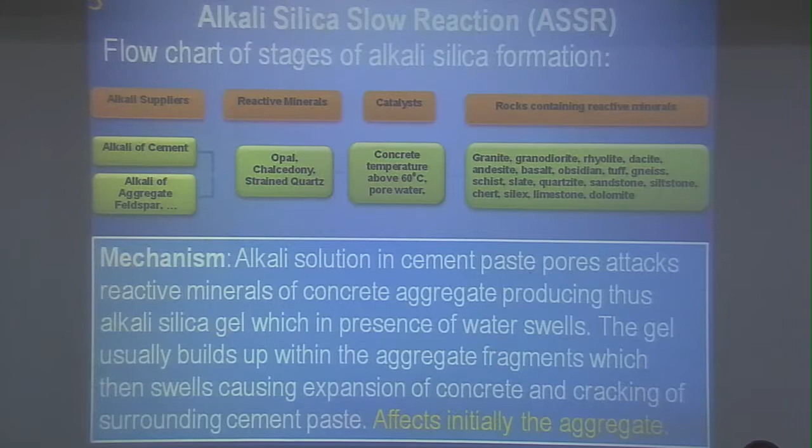I will start first with alkali silica slow reaction. It is one of the most exploited topics nowadays in current literature publications. What is the chemical model of that? Alkali of the cement reacts with reactive minerals of the aggregate of the concrete, causing alkali silica gel presence, which in the presence of water swells.

It is very important to note that the gel formed by the alkali silica reaction is within the aggregate fragments of the concrete, not within the cement paste. At the end of the day, in the case of long-term performance of that chemical disease of the concrete, it may cause swelling of the concrete itself.

I also wish to emphasize that as a catalyst for this process, there is concrete temperature - which available case studies emphasize a benchmark of 60 degrees - and also pore water in the concrete, meaning moisture in the concrete. There were a whole variety of rock masses, ranging from igneous to sedimentary rock masses, which can be subjected to slow alkali silica reaction.

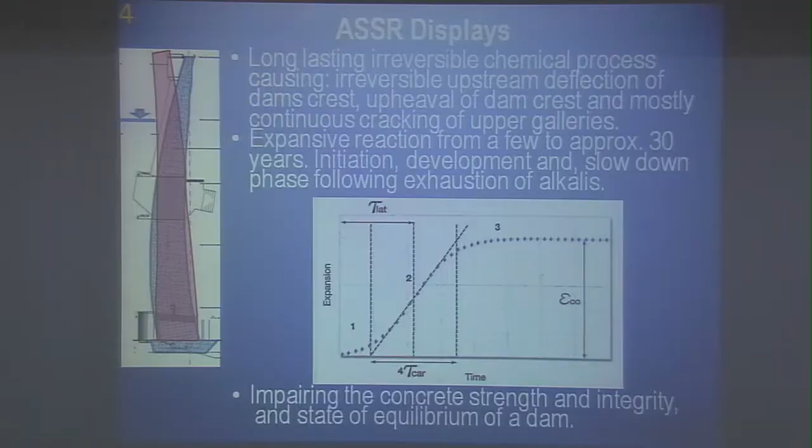The main issue here is the mechanism for such an unusual deflection of the dam. Why is it deflected that way? Well, it is our interpretation and assessment that this is because of interaction of the swelling process and the stress fields imposed by service load conditions.

Here, it usually happens that during low water levels, usually during summer periods of time, with higher temperature of concrete due to environmental temperature, the dam by itself deflects upstream.

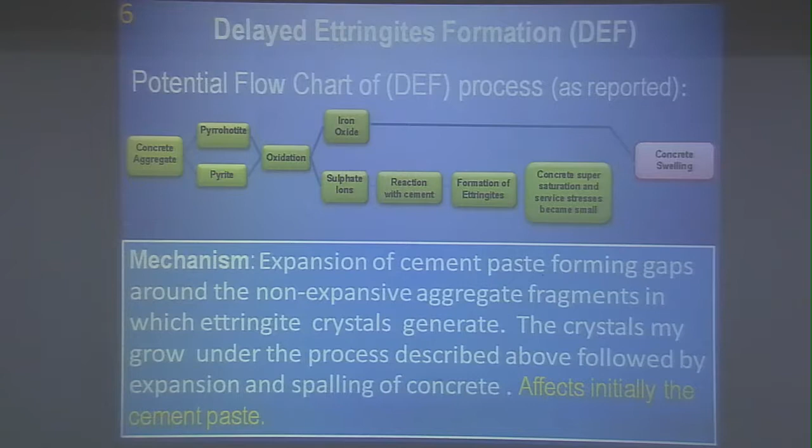Unlike the alkali-silica reaction, it affects the cement paste, not the aggregate. That is the main difference between delayed ettringite formation and slow alkali-silica reaction.

May I continue, please? The mechanism of the formation of damage to the dam due to delayed ettringite formation is very similar to that of the alkali-silica slow reaction.

It becomes pronounced in the zones of tensile stresses of the dam. Again, we are witnessing the case of interaction between the swelling process by ettringite and the current service stresses of the dam body due to service loads. That is the case with lower water level and higher temperature of the concrete.

There is another issue which I wish to bring to your attention: why is cracking happening within the upper stretches of the dam, within the galleries? Why is it happening?

Again, because of interaction between the swelling process and the current stresses there. Due to lower water level but minimum concrete temperature, there might be tensile stresses developing around the galleries. Those tensile stress fields,

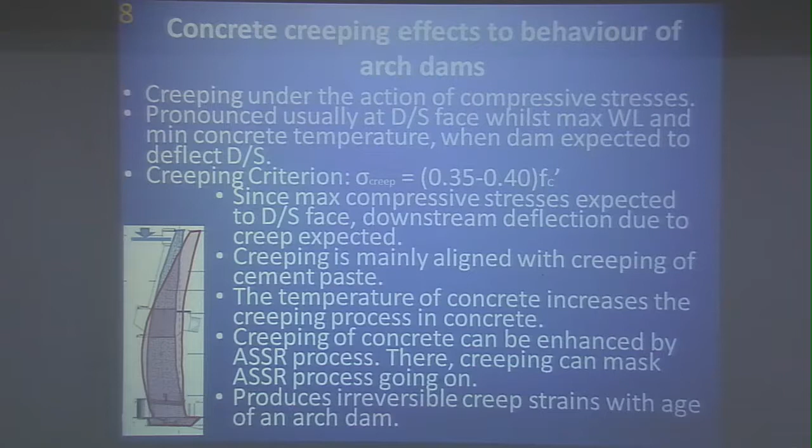Creeping of the arch dam, of the concrete in arch dams, is a complex process, please, and there is not much information about that. There are some empirical approaches which we have taken from the Ross Dam, United States.

There is another issue, which is the joints of the arch dams. Every arch dam could have joints. This is due to the technology of construction of that kind of dam, in which the mechanism of calcium hydroxide within the concrete paste could react with water, which can capture carbon dioxide and produce calcium carbonate and water.

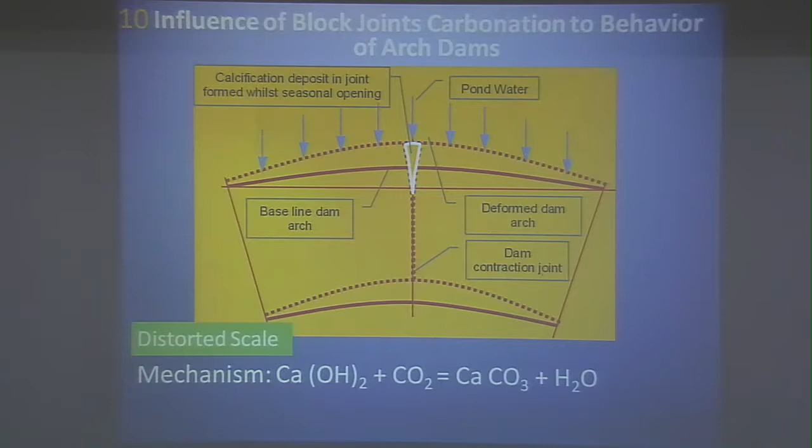Conclusions have already been emphasized here and there. I wish to thank you for your attention, and I'm really sorry that I didn't have more time to explain in more detail the other issues of this very important topic, which is very important nowadays for all dams, including the arch dams.

The various aspects required to be looked into while reviewing safety of an existing dam: first is design flood study review. Next is to carry out a flood routing study and work out the new MWL. Then check the adequacy of freeboard for that revised MWL. Then look into whether there is a need for an additional spillway, or if a parapet wall is not there, whether it would work or not.

Those aspects. Then we are also required to look into the examination of various causes of distress in the dam. There could be excessive seepage through the dam, wet spots, lot of water in the galleries, leaching, cracking in the dam due to various causes, damages to concrete in the spillway, mainly abrasion damages, energy dissipation. Slotted roller buckets have a lot of problems, so do many stilling basins. Indications of any piping, boiling, things like that on the downstream of the earth dam.

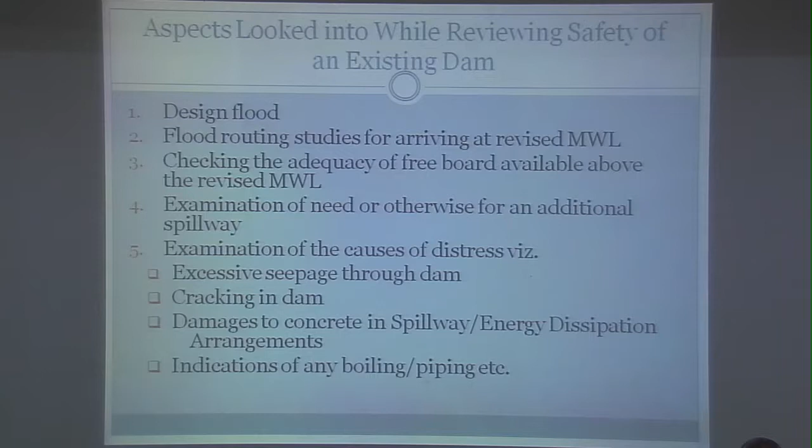Then we may have to check the stability of the dam and spillway due to the revised MWL on account of revision in design flood, and on account of changes in seismic parameters or change in seismic zone. Then there are issues related to hydromechanical equipments, outlet works, and things like that. There are a lot of other aspects as well.

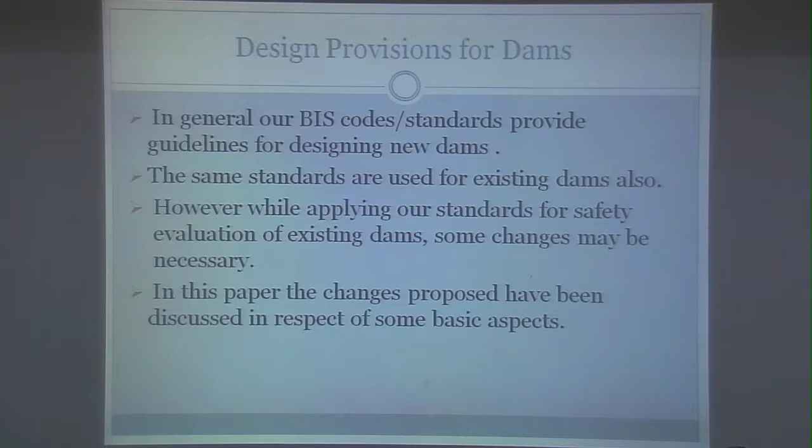In general, our BIS codes and standards provide us guidelines for designing new dams. The same standards we have been using for existing dams also. However, it is felt that while applying our standards for safety evaluation of existing dams, some changes perhaps could be considered or may be necessary. In this paper, I tend to dwell on those aspects in respect of a few subjects.

The first aspect is the freeboard aspects. So the relevant BIS codes I have listed there: IS 10635 is on embankment dams, and 6512 is for gravity dams. What these codes provide is that the 1 meter solid parapet wall on top of the dam is not to be considered as part of the freeboard. We don't consider it as part of the freeboard while designing new dams, whether it's an embankment dam or a gravity dam.

However, for existing dams, because the flood many times goes up two times, three times, and like that, there may be a need to make some deviations in this. So what I propose, and it's for the August gathering to consider, is for an existing embankment dam, the solid parapet wall could be taken as part of the freeboard, in case the parapet wall is otherwise structurally safe.

The second thing is, the maximum water level for the revised flood should be lower than the top of the impervious core. This we need to ensure for an earthen dam. And for existing gravity dams, maybe the revised MWL could be allowed to reach up to the dam top, where a 1 meter solid parapet wall is there. These are not just my ideas, some of them are also given in the USBR and various other literature.

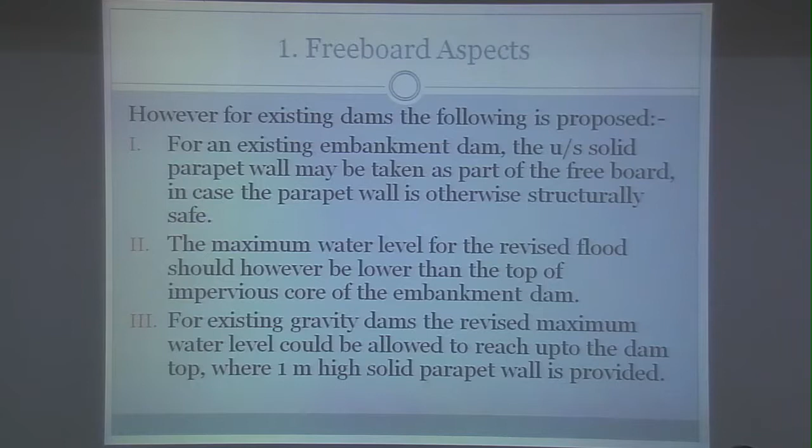Then there is the issue of consideration of 10% gates as inoperative. IS 11223 guidelines for fixation of spillway capacity says that this condition is to be checked, and it is to be considered as some sort of an emergency condition, and a reduced freeboard could be acceptable. So we have been following this condition for the design of all new dams.

However, for existing dams, probably we could make some deviation here. As I said, the flood after revision goes up 2 times, 3 times, and maybe more, 4 times, 5 times. So in general, probably I feel there may not be any need to check an existing dam for this 10% inoperative gates condition. However, we have to make sure that all the gates are in working condition, and all the O&M guidelines and all those things are being followed.

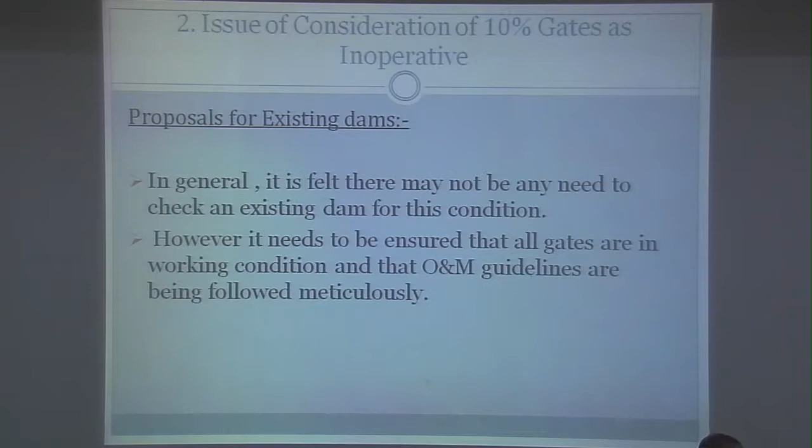Coming to the third point: the stability analysis of an existing earth dam. This is basically with respect to the method to be used for analysis. Supposing we are required to check the stability of an existing earth dam, IS 7894 is the code of practice for stability analysis for earth dams.

The methods discussed in this code are the Swedish slip circle or the Fellenius method, and the sliding wedge method for rock fill dams. The Fellenius method considers only the moment equilibrium and not the force equilibrium of slices. It provides a factor of safety generally on the lower side, resulting in a conservative design, which is fine for a new dam.

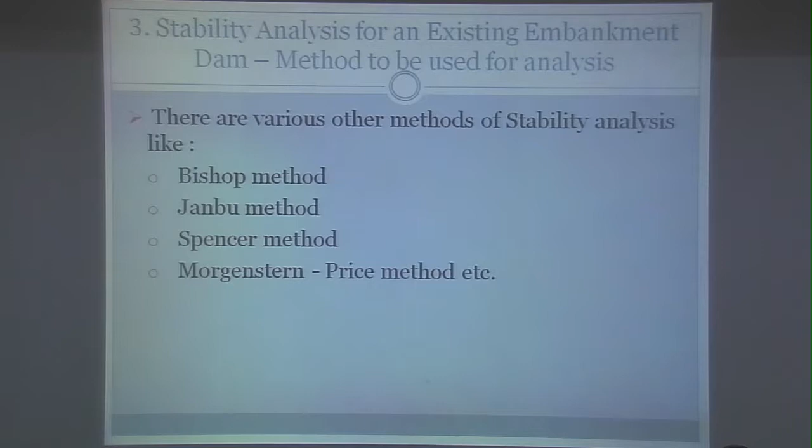But there are other methods of stability analysis also, and I have listed a few here: Bishop's method, Janbu's method, Spencer's method, Morgenstern Price method, and others. It may be preferable to adopt a method which satisfies both the moment equilibrium as well as the force equilibrium, and which takes into account the interslice forces and results in a closed polygon.

The methods recommended, which could be considered for carrying out stability analysis of an existing earth dam, are the Morgenstern Price method and Spencer's method. We could make use of software like Slope W from GeoSlope.

What happens is that the Fellenius method gives a low factor of safety, and if it's an earth dam, making any changes in an existing dam is difficult. So if we are checking the stability of an existing earth dam using these other methods, probably we may get a safe factor of safety, one which is adequate, and we may not have to do anything to them.

Then the next point is stability analysis for an existing concrete or masonry gravity dam. This is with reference to permitting cracking in the dam. As per IS 6512, the code of practice for design of concrete masonry solid gravity dams, we do not permit cracking in dams. Cracking is not permitted for any new dam.

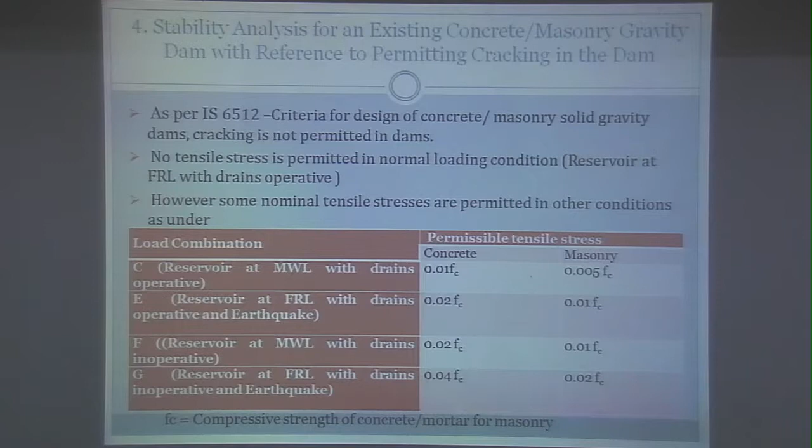And we could follow the approach of USBR, given in the publication Design of Small Dams. The methods are fully described there; I am not getting into that. I am only listing the assumptions involved.

For static conditions, meaning the MWL conditions with drains inoperative, the vertical stress distribution along a horizontal plane without uplift is assumed to be linear between the upstream and downstream faces of the dam. This is the first assumption.

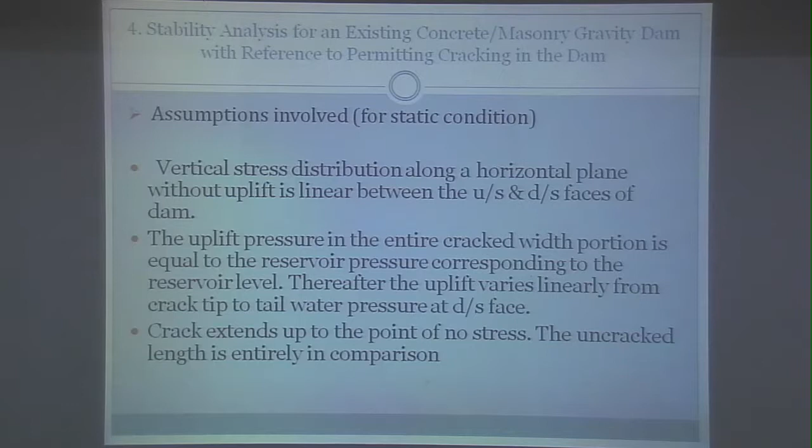The second assumption is that the uplift pressure in the entire cracked width portion is equal to the reservoir pressure corresponding to the reservoir level, the MWL in this case. Thereafter, the uplift varies linearly from that point to the tailwater pressure on the downstream face. The crack extends up to the point of no stress, and the uncracked length is entirely in compression. These are the three assumptions.

The stability criteria followed when cracking is allowed is that we check for compression and we check for sliding stability using the uncracked base width of the dam.

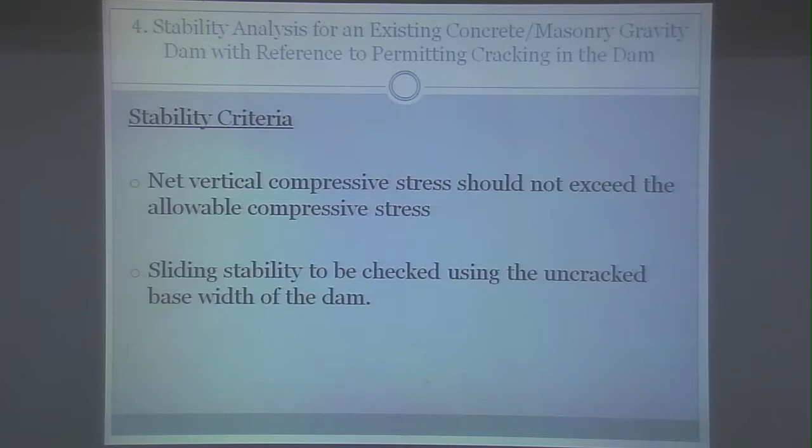For condition G, the earthquake condition with drains inoperative, there is an additional condition given by the Bureau of Reclamation: in the crack length, the uplift pressures are assumed to be zero. So there is a crack length and an uncracked length. In the crack length part, the uplift pressures are taken as zero because during an earthquake event, the opening and closing of the crack is so rapid that it does not allow the reservoir water and associated pressure to penetrate.

This is an additional assumption. If the sliding and stress levels are found satisfactory for the cracked section during an earthquake event, then there is a need to also check the post-earthquake static condition. While checking for the post-earthquake condition, we should include the full uplift pressure in the cracked part also.

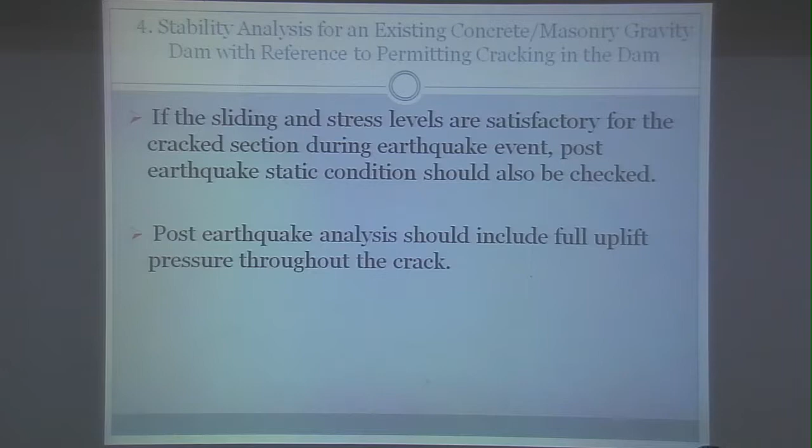And that's it. Thank you.

This long experience in dam design has brought out clearly what the criteria to be adopted.

Hello? Switch off. Do you hear now?

This long experience in dam design - Mr. Mathur, with his long experience on dam design, has clearly brought out the distinction between the standard practices to be adopted and how the design criteria can be distinguished between an existing dam and a new dam. Especially in this seminar, with engineers from different states involved in checking the stability of various structures under the DRIP project, I hope his talk could be very useful.

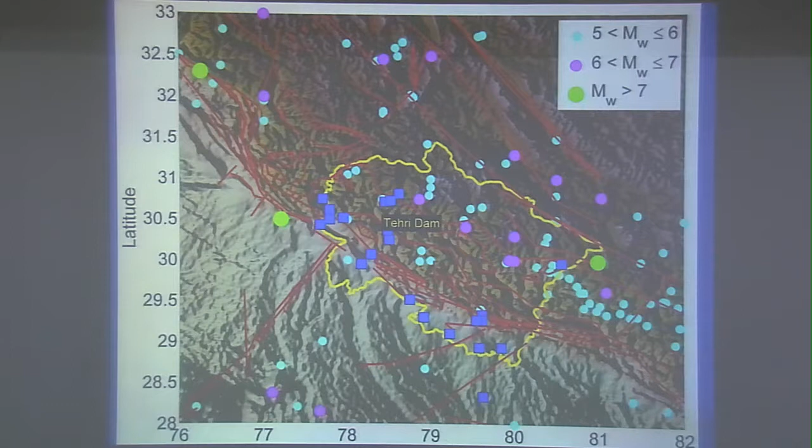This app gives you a list of faults and other information. If you zoom into the Uttarakhand region, the fault map looks like this. These blue squares are the locations of the new dams, and Tehri Dam is here in the state of Uttarakhand. You can see that most of these dams are located very close to faults, or may even be lying on top of faults themselves, which is a little scary when you look at the figure.

So now, regarding Tehri Dam, a lot of structural studies have been done - 1D, 2D, finite elements, so much information is available. But what is missing is a reliable seismic input which can be used to check the safety of this dam. So we have concentrated more on generating a reliable seismic input, and we have not touched much on the structural aspect at this point of time.

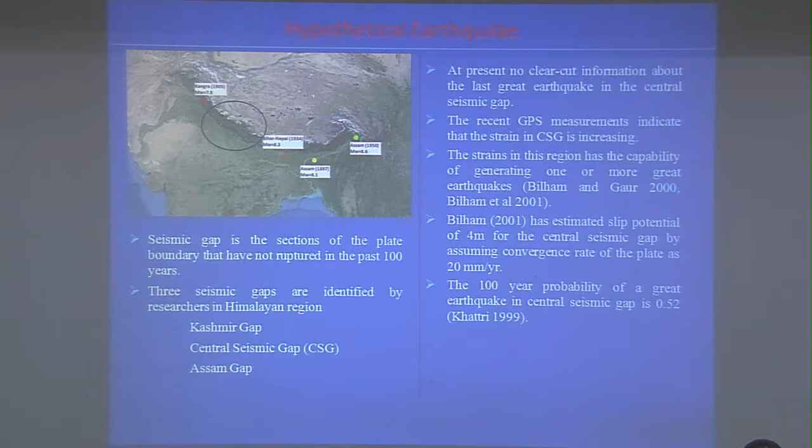As I already told you, our interest is in generating reliable seismic input. If you see the past data, the maximum magnitude observed in this region is 8.5, based on past seismicity and GPS measurements. So what we have done is try to generate ground motion for this 8.5 as accurately as possible.

So we have done the finite element model of the whole Indian subcontinent, including topography, bathymetry, everything. The material properties are mostly taken from worldwide databases, but since some material properties are available in the Indo-Gangetic Basin and Himalayan regions, we incorporated information from NGRI and other journal articles. The number of degrees of freedom is around 12.7 billion, and our average element size is around 2 kilometers.

So now this finite element mesh we have developed, and of course you cannot run it on one computer. You require a supercomputer which is available at our IIT - this is our Virgo cluster. So now we have run this.

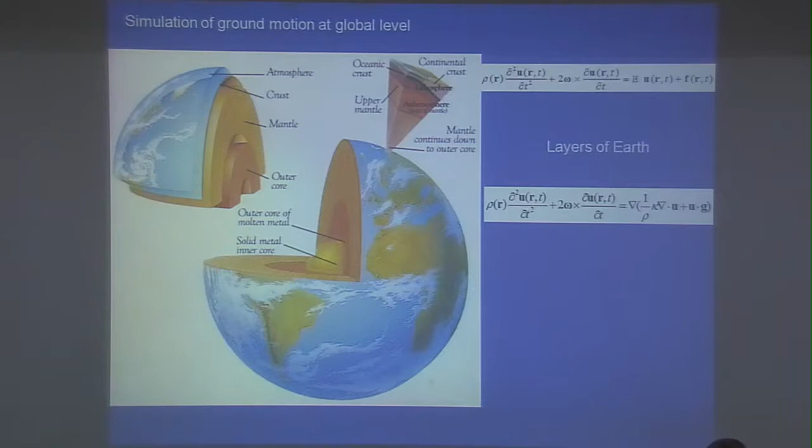These are the basic equations of motion for our Earth. If you open any geophysics textbook, you will get all these equations for a spherically symmetric Earth, including gravitation as well as hydrostatic equilibrium. So these are some of the basic equations which we solve using our finite element mesh.

Regarding the seismic force we should use to simulate ground motion, lots of data sets are available. We ourselves have a project from the Ministry of Earth Science to quantify these seismic forces. So we have developed stochastic models based on past earthquakes, which we used to generate slip distributions for the 8.5 magnitude scenario.

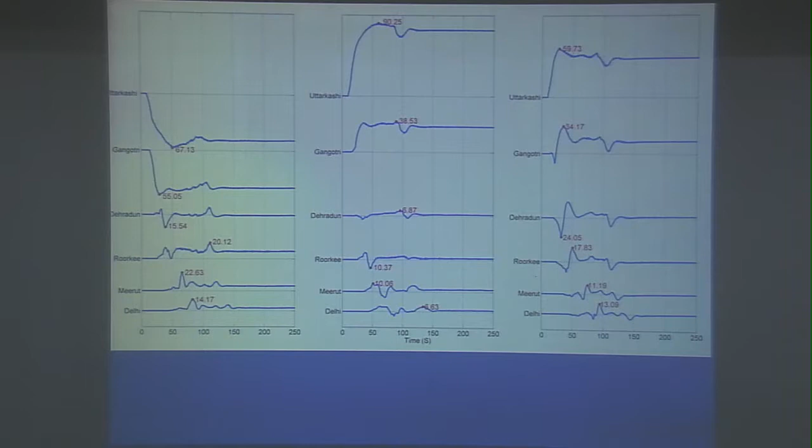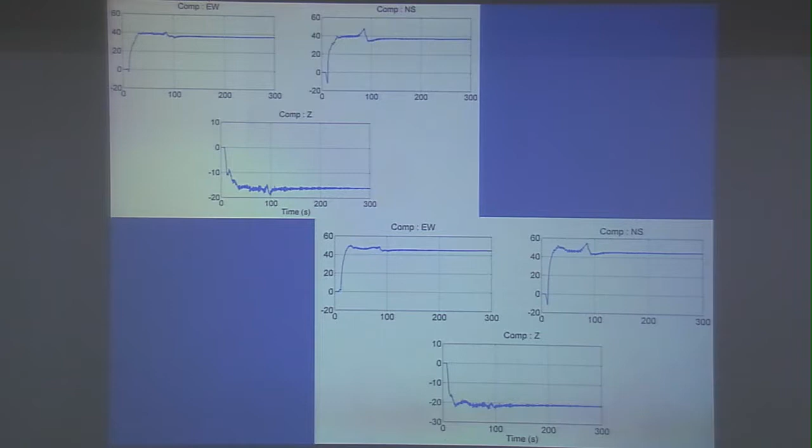So once again, these are displacements at Tehri for a variety of slip models. If I change the slip, this is what happens - I'm showing two samples. You can see all the displacements are oscillating and not coming back to zero, indicating residual displacement after the end of the earthquake.

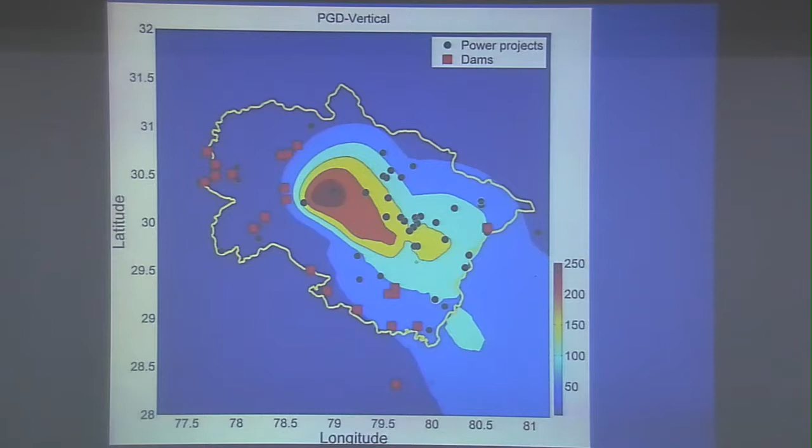These are the ground residual displacements after the end of earthquakes, which you will see as cracks or openings. This is shown in east-west and north-south directions, and this is the vertical displacement. The uplift is about 2.5 meters, meaning after the earthquake ends, the whole land will rise by around 2.5 meters.

Now physically, what does this tell us? This is one spectacular dam failure, the Shih-Kang Dam in the Chichi earthquake. This dam was built on top of the fault itself, so when the dam is built on the fault, you can see during this earthquake this portion has raised by 7 meters.

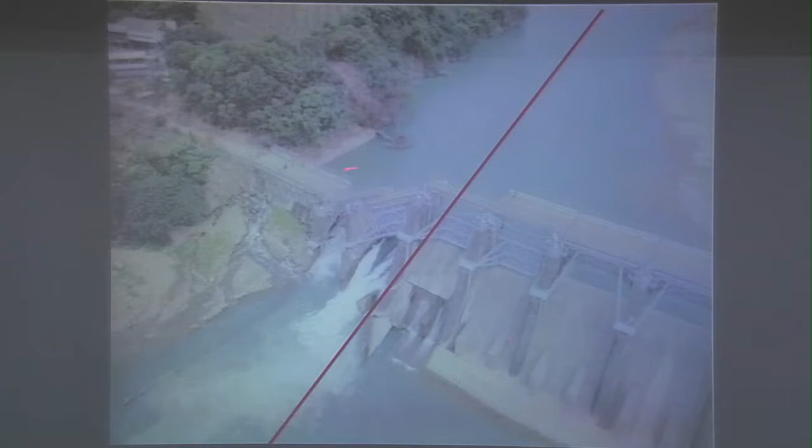So now you can see there are no cracks, nothing, but this dam failed due to this peak ground residual displacement. The same figure, if you see from the other side, you can see this whole portion has raised by something about 7 meters.

So this type of thing becomes very important in design. When the structures are very near to this fault site, it is not just only the PGA, but peak ground residual displacement is also a very important parameter when you are designing dams very close to these faults.

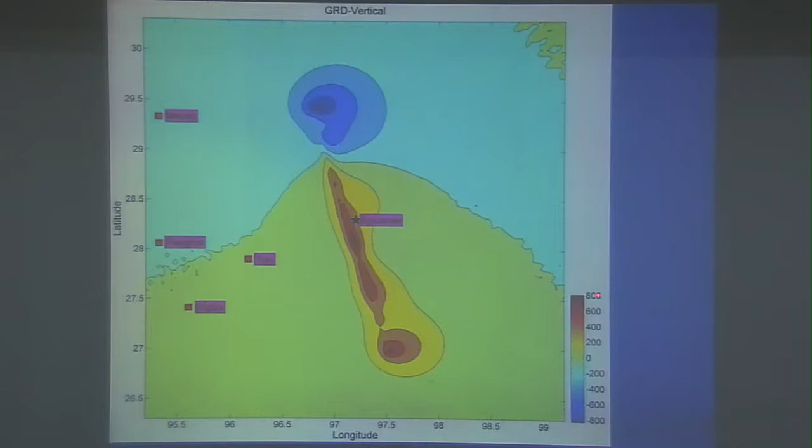In our Uttarakhand regions, our peak ground vertical displacements are not as high as 8 meters, we got some 2.5. But when we simulated for some events in the northeastern region, especially this 1950 Assam earthquake, the residual displacements are also as high as 8 meters.

So that is about peak ground residual displacements, which become very important when you are close to these faults. But when you do traditional vibration analysis, we require acceleration time histories. Now whatever finite element mesh and other things I have shown are more reliable in simulating low frequencies such as displacements, but when it comes to accelerations, it becomes a little bit complex.

So we have used some empirical Green's function techniques and others to simulate ground motion. In the last 5 years, IIT Roorkee has put up a nice network, and we have very reliable and very good quality strong motion data. So we used these things to simulate accelerations also.

This is the fault plane, and these are the earthquakes for which we have the data at Tehri station. So this is some empirical EGF technique.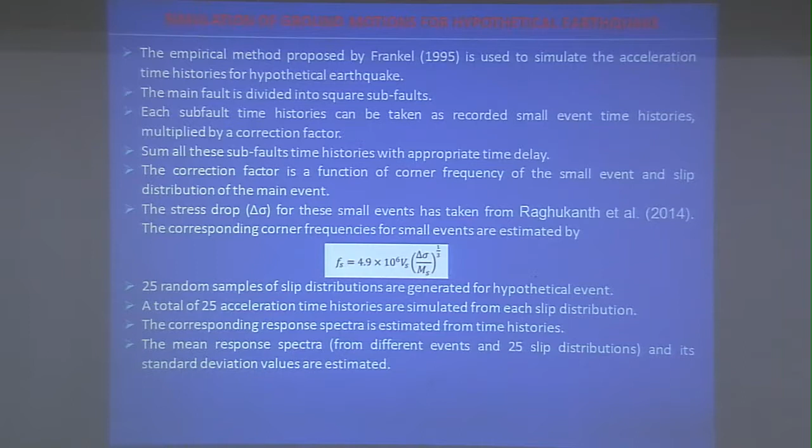Yes sir, I understood your point. See, for the 1950 earthquake in Arunachal Pradesh, there is one lake named Madhuri Lake. There you can see the fault upliftment of something around 6 meters. There was an artificial lake which was formed after the earthquake.

No, this was the fault scarp itself. No, the lake was from the fault scarp, we can see. Sir, yes.

No, what I have done is this: these things are valid at rock level. As you rightly pointed out, if I include the geotechnical information... I told the 10 kilometer depth. No, as I already told you, we have done this at rock level. Of course we have to add one more geotechnical layer, and it may not be like a rigid body, some translations will be there.

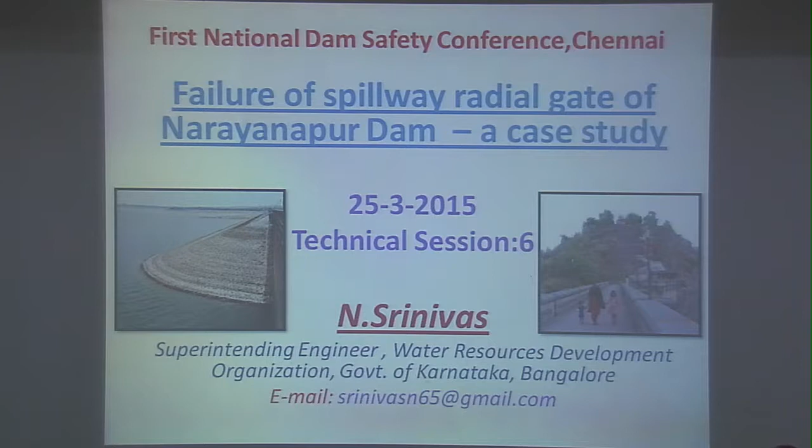So I will be talking about the failure of the spillway gate of Narayanapur Dam, how a construction error as well as an improper maintenance schedule or inspections can lead to a failure. The presentation is structured with some salient features of the Narayanapur Dam, followed by the genesis of the gate failure and the event itself, the implementation, and a conclusion.

The Narayanapur Dam has been provided with 30 radial spillway gates, out of which 25 are in the main spillway and 5 are in the auxiliary spillway. They are of the size 15 meters by 12 meters with a discharge capacity of 45,000 cusecs per gate, operated with an electrical rope drum hoist mechanism. It was commissioned during the period 1982 to 1984, and fabricated and designed by TSP and Sikka. The spillway capacity has been designed for about 13,40,000 cusecs with a frequency of 1 in 10,000 years, with 10% of the gates in non-operation condition as per the norms.

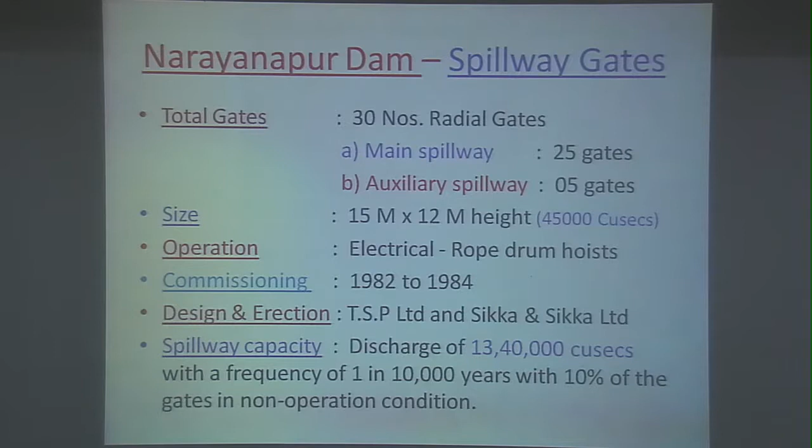This dam has manifested its distress signals even earlier to the event which I am now presenting. During 1990-91, there were some failures in the weld joints in some gates like 3, 6, and 15, which was rectified by the fabricator himself. And in November 1992, the auxiliary spillway gate number 5 got damaged.

When the government constituted a committee to find the cause, we found that it was the failure of the bulkhead gate. All these 5 auxiliary spillway vents, before the erection of the radial gates, were fitted with elements: 3 vents were fitted with stop log elements and 2 vents were fitted with bulkhead gates. But even after the commissioning of the spillway gates, the bulkhead gates were not removed from their position. So the bulkhead gate failed during 1992.

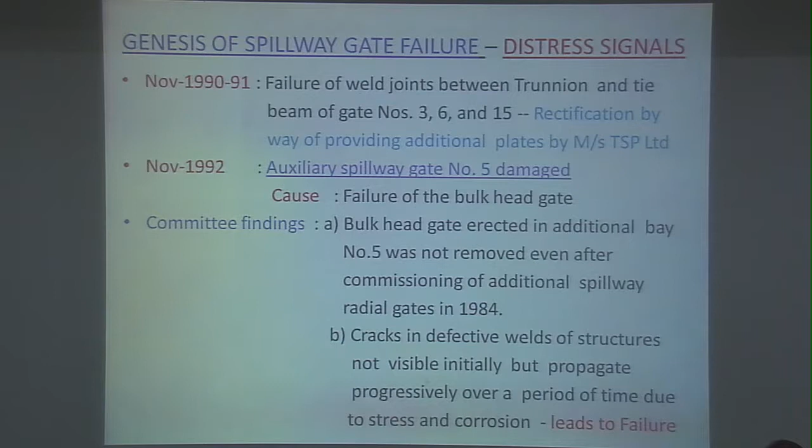The conclusion was that the cracks in the defective weld structures had propagated over a period of time, which led to the failure of the bulkhead gate. It also had some inherent shortfalls during the construction, fabrication, and erection time, wherein the skin plate and the wall plate was not matching in some gates. There were some improper fixing of wall plate to the designed vent width, and also loss of curvature of the skin plate during erection.

So the gates committee made some recommendations which were attended to, and ultimately that auxiliary radial gate was replaced. This is the main event which I was referring to, on 6th October 2005. The dam was at its FRL of 492.25 meters, and the central gates were in open position and surplusing.

At around 11 a.m., the main gate number 5, from one end, got dislodged from its position and was pushed into the river bed downstream about 100 feet. The Government of Karnataka constituted a team, and experts made the inspection and recommended depletion of the reservoir to about 486.5 meters, about 6 meters depletion, which resulted in about 20 TMC of water being let out during that period. For the next 2 days, the stop log elements were put into place and the vent was plugged.

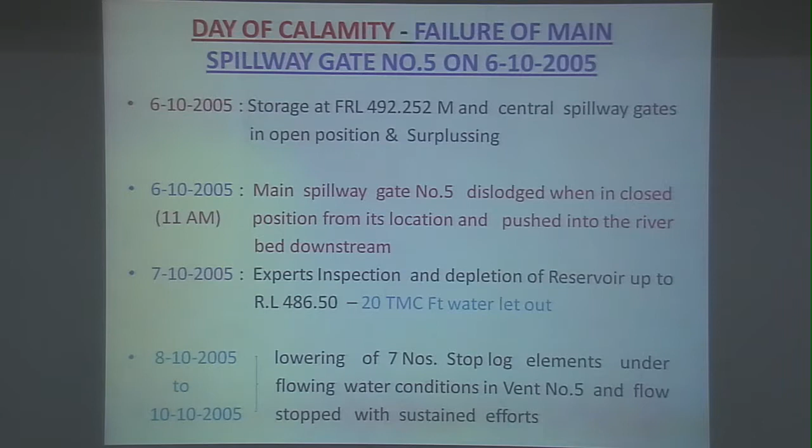This was the view of the dam during that flood regulation, and this is a vent which has been plugged using the stop log elements. You can see that the trunnion and the yoke girder, everything, has gone along with the gate assembly. Those are the stop log elements which are in place.

The committee also assessed and came up with the sequence of the failure as to how this gate would have failed. The sequence is: there was a failure of the joint between the yoke girder and the trunnion, which resulted in disturbance of the trunnion, leading to a huge strain at the junction of the arms and trunnion. This led to the entire load of the gate coming onto the left arm assembly, resulting in the bolts connecting the trunnion to the rest beam snapping.

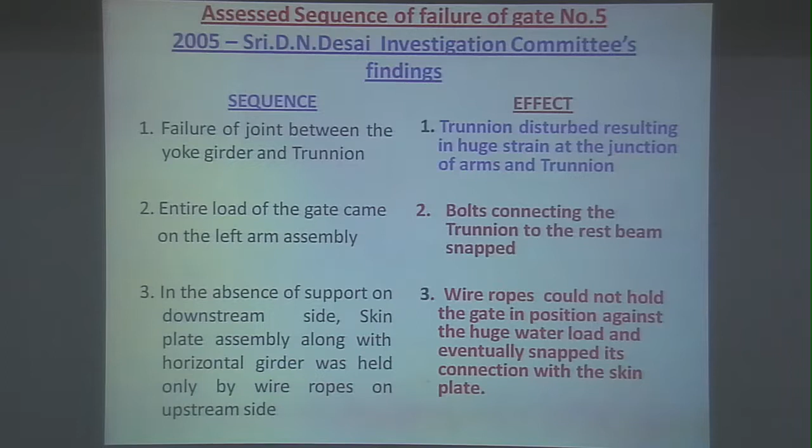In the absence of support on the downstream side, the skin plate assembly, which was held by wire ropes on the upstream side, couldn't hold the gate in position and eventually snapped its connection with the skin plate. So the entire skin plate assembly, with horizontal girders and left side arm assembly with trunnion, slid along the spillway profile and was pushed out of the spillway bucket, moving nearly 100 feet into the river. Similarly, the right arm assembly was also transported to the river bed.

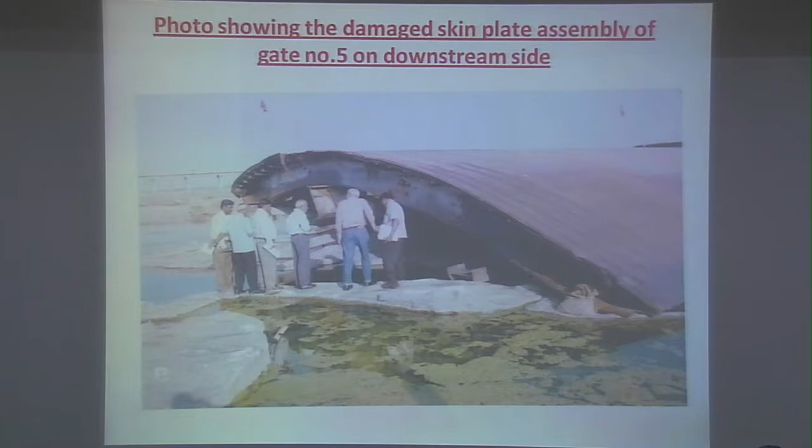This is gate number 5, which was found in the river bed at about 100 feet from the spillway. We can see the chairman of the committee, Mr. D.N. Desai, inspecting the gate at the river bed.

These are some photographs of a typical tie beam joint before the failure, and the spillway gate tie beam on the left side, where we found that the weld joints were not to the designed penetration thickness. These are photographs of the tie beam right side weld joint. What was found is that the weld was not properly penetrated to the trunnion proper, and there were some rods and plates found placed in the weld gaps. This was a finding of the committee after the inspection of the failure.

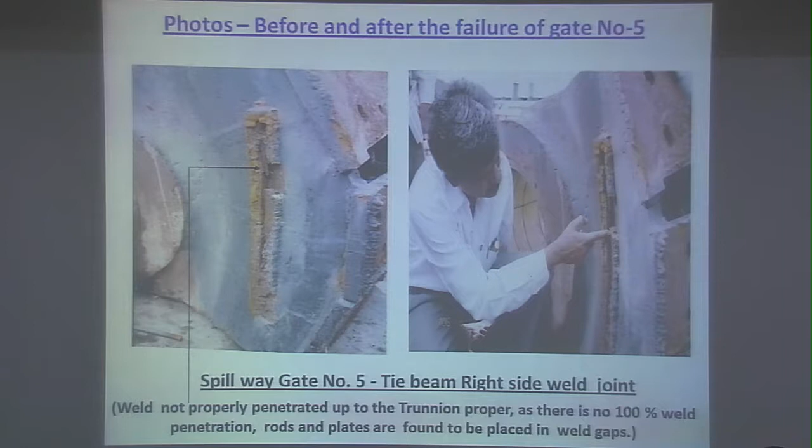The causes of the failure were concluded by the committee as the failure of the fillet welded joints at the junction of the tie beam between the trunnions and the trunnion proper itself. The weld failure was also due to progressive rusting from ingress of moisture and water over a period of time, and inadequate inspection and maintenance, which was limited to lubrication, replacement of wire ropes and seals, and periodic maintenance over successive years without actually going into the crux of the problem and attending to the inherent weld defects and other problems, because of lack of capacity of our engineers as well as frequent changing of engineers in our bureaucratic setup.

So the recommendations made were that all the weld joints be redone to the design thickness, the scale formation of the skin plates be removed and painted, and the stiffeners which have lost thickness by more than 2 mm need to be replaced. They also recommended strengthening the joints of the trunnion tie and the joint between the tie beam and the trunnion proper themselves.

So these were implemented. The damaged gate number 5 was replaced in 2007, and the other recommendations of the committee regarding strengthening and other aspects were covered in 2 phases from 2007 to 2011.

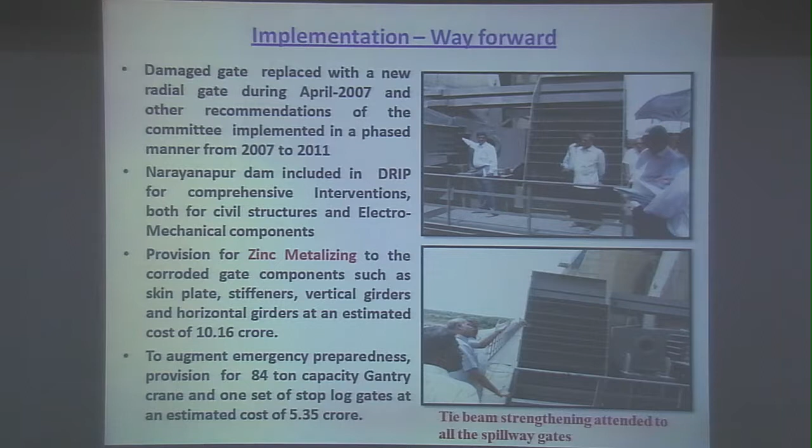And the way forward is that Narayanapur Dam has been included in the DRIP project. We are taking up a comprehensive intervention for both civil and hydromechanical components. We are trying to provide zinc metallizing for the skin plates to arrest further corrosion of the skin plates. Also, to augment emergency preparedness, we are making a provision for a gantry crane along with one set of stop log gates, at an estimated cost of 5.35 crores.

In conclusion, I would like to say that the hydromechanical components of a dam are as important as the main structure, and need utmost attention towards their upkeep and maintenance with systematic, regular inspections. They are the lifelines of storage and safe discharge of floods, and for preventing the loss of invaluable human life.

The impetus should be towards modern techniques of crack detection, such as thermal imaging or ultrasound. I think the industry would need to help us in this regard. We also need emergency preparedness actions, like stocking welding equipment and other allied equipment, to tide over in case of any failures.

On the institutional part, what is required is that all officers up to the level of chief engineer are to be made responsible for pre-monsoon and post-monsoon inspection of dams. In our state, we have a DSRP panel along with DSRT teams, which look into the safety aspects of all our dams.

And it is the strict compliance of these committee recommendations that would go a long way in maintaining the safety of our dams. Thank you, gentlemen.

Thank you, Mr. Srinivas. Your paper is very interesting. Many times when a failure occurs in a dam, engineers fail to report it, or rather publish it as a paper. So failure only makes us learn and improve our system. So that way your paper is good, and it is apt also for the DRIP project.

Earlier this dam was built long back and no records were available for this project. The dam was again constructed in 1988, and in 2010 it failed. When we investigated the project, it was found that probably the reason for the second failure and first failure could have been the same.

The dam failed on the night of 20th and 21st August 2010, and nobody saw it, and there were no records of earlier discharges and all those things.

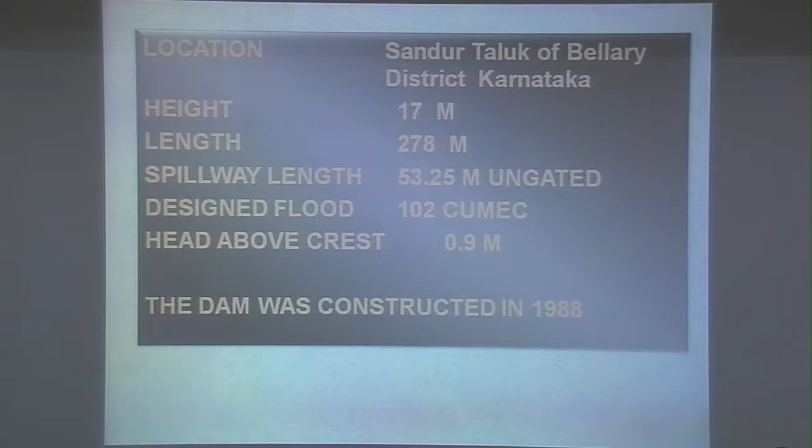The height of the dam was 17 meters, the length 278 meters, there is a spillway of 53.25 meters, and the design discharge was 102 with a head 0.9 meters above the crest level.

Now, the dam breached from the middle of the deepest section for a 71 meter length, from 199 to 270 meters, and there was a rainfall of 102 mm over 9 hours. That was the only record which helped us find the cause of the failure.

And through field observation, we generated all the data on the basis of field observation and other things. The dam was inspected by Dr. Y.K. Murthy, who was chairman of DSRP, in December 2009, and about 7-8 months after that, the dam failed.

His recommendation was that the spillway should be designed for SPF. Actually, he suggested that the spillway should be designed for 1 in 100 year and checked for SPF. But being a medium dam, I discussed with him that it should be SPF only, not 100 years.

Then there was extensive damage to the bed pitching slab provided for 4 drop walls. That was before the failure. These were the things that were reported.

Then the freeboard was not as per the codal provisions. Stability was not checked because there were no properties of the material by which the dam was constructed, and nothing was verified for that. Then he said that a few piezometers should be installed so that we can have the phreatic line and all these details.

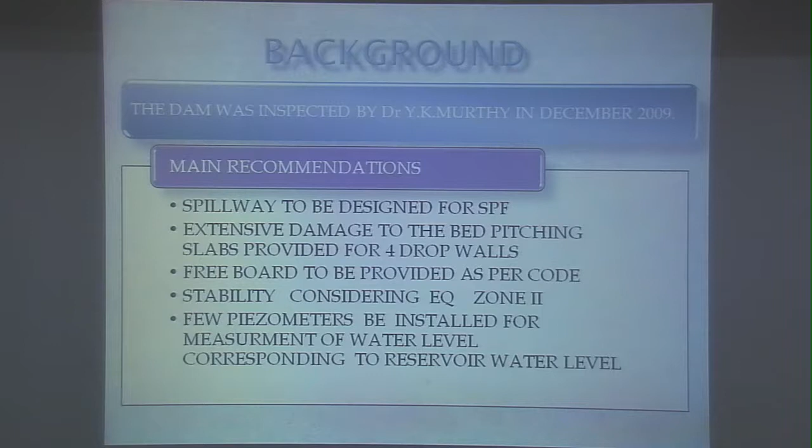After the dam failure, one member of the DSRP was deputed by Dr. Murthy because he was not able to go to the site due to health conditions. He submitted a report stating there was about 1.5 meter depth of water over the spillway from the flood mark. He noticed a flood mark on the side of the spillway showing 1.5 meters, and using rainfall data they made a hydrograph and calculated the maximum discharge was 219 cubic meters.

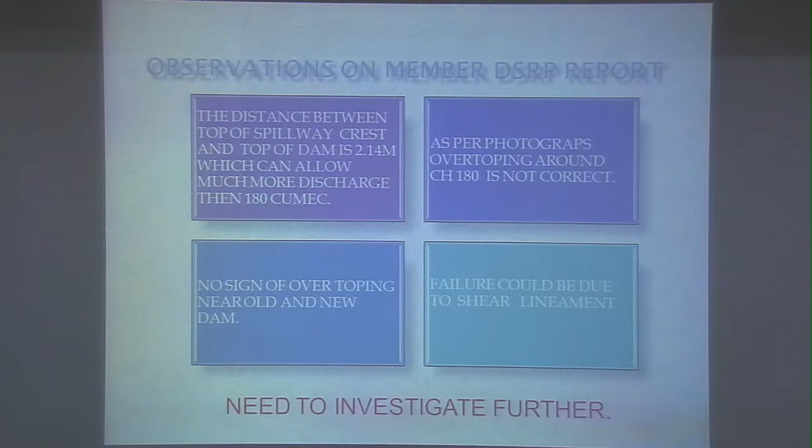Then the CWC and GSI team went to investigate the project and ascertain the cause of failure. We listed 4 items and investigated each: overtopping due to high flood, failure of foundation due to shear lineament, overtopping due to wave action, and slip failure of the earth dam.

Considering how to check for overtopping: first, the water level mark on the spillway was only 1.5 meters, but there were no signs of flood marks upstream of the spillway. Only a small portion of the crest level was concreted, and the rest was soil covered with vegetation, and since 6 months had passed we could not see any marks. But as per our experience, the water level in the reservoir should have been more than the water level at the crest, because of the approach velocity and water profile.

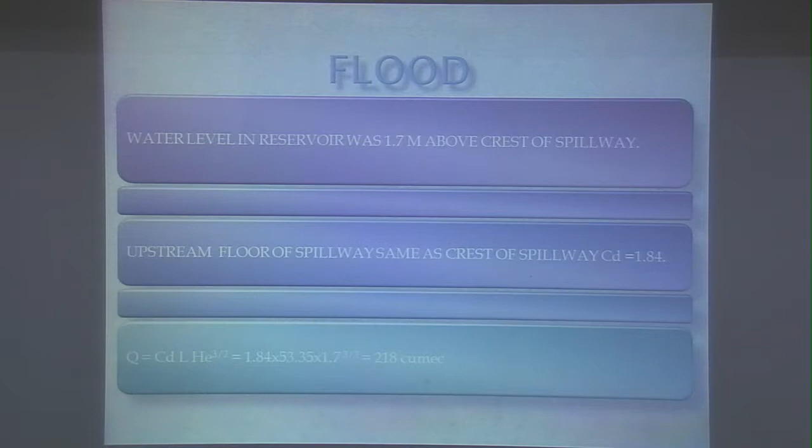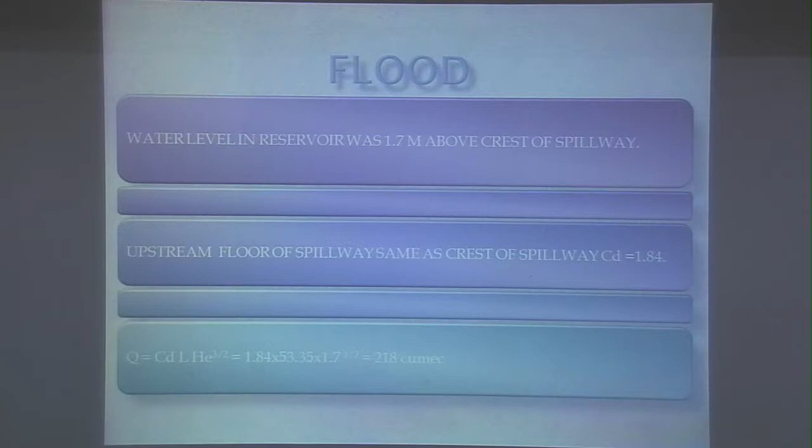When we calculated using our codal provisions, the water level was 20 centimeters more, making it 1.7 meters, about 20 centimeters more than the water level mark. We calculated the discharge was 218 cubic meters, which matched the flood hydrograph. If this is the condition, then it cannot overtop, because 1.7 meters is well below the 2.14 meter gap between the top of the dam and the spillway.

Then the shear lineament theory. The existing section breached, and when we saw the actual breaching portion, it was 2 to 3 meters above the foundation, while the shear lineament was suspected to be below the foundation. So chances of failure from the shear lineament angle were not suspected. Even the geologist with us interpreted the regional geology and extended the shear plane, and it was crossing somewhere near the spillway. Therefore, shear lineament failure was not anticipated.

Then the overtopping. We asked them to supply different cross sections of the dam, and they found that the dam had settled by more than 30 centimeters in different places, with 45 centimeters near the place where the slip had occurred. We ignored that 45 centimeter value and used the 30 centimeter value to calculate the freeboard.

We calculated a wave height considering this length, and found that we required a freeboard of 0.64 meter, with a significant wave height of 0.41. Considering all these factors, only 14 centimeters of freeboard was available, with 1.7 meters above the crest water level and 30 centimeters of settlement in the dam, leaving hardly 14 centimeters of freeboard. Even a significant wave height could have crossed it. That was one reason we could ascertain from this analysis.

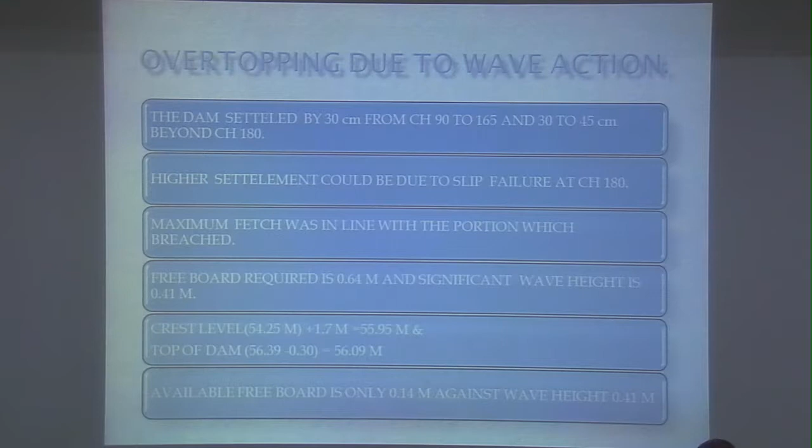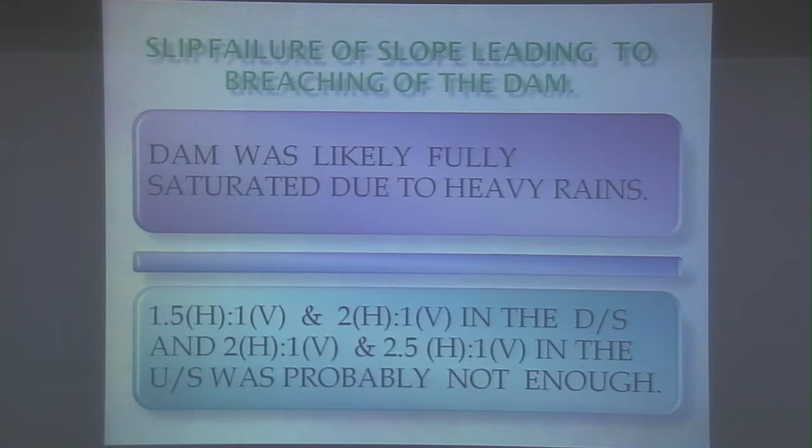Then the failure of the dam due to slip failure. The dam had full rainfall for 9 hours, and the whole dam was saturated from upstream to downstream. With the photographs available, there were chances of anticipating that the dam had failed due to slip failure. The slopes provided there, since we don't have any properties of the material, we could judge that the slopes provided were not sufficient.

On all these bases of conclusion, we anticipate that the failure was either a slip failure or triggered by a wave action, and the dam failed.

Now, the basic codal provisions that were not followed, and the state of the art which made the dam fail: the spillway should have been designed for SPF, freeboard should have been provided as per codal provision, and no water cushion was provided. Now, all the drop walls, we'll see the photographs, at the drop the floor was horizontal, there was no water cushion on the downstream side, and due to that all the spillway was washed out.

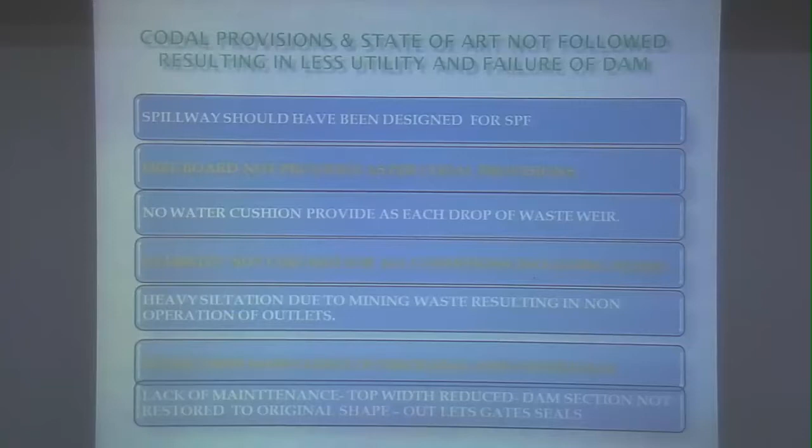Then stability has to be checked for all conditions, including seismic. Then siltation: there is mining upstream of the dam catchment area, and all the mining waste comes into the reservoir, and due to that mining waste, both outlets were not working. The silt had already come half a meter above the sill level of the outlets, and they were not able to operate them. The people downstream were using this dam as a recharging ground, and they were pumping water from the downstream only before the failure.

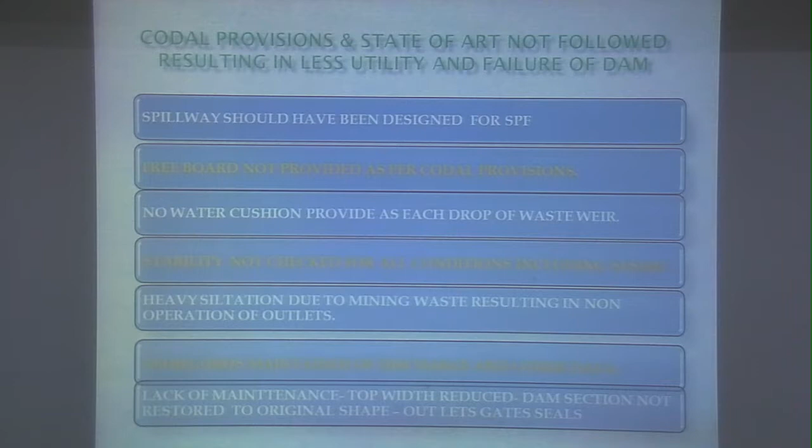And there was a lack of maintenance also. There was no maintenance of the seals because the outlets were not working, they had not done any maintenance to these issues.

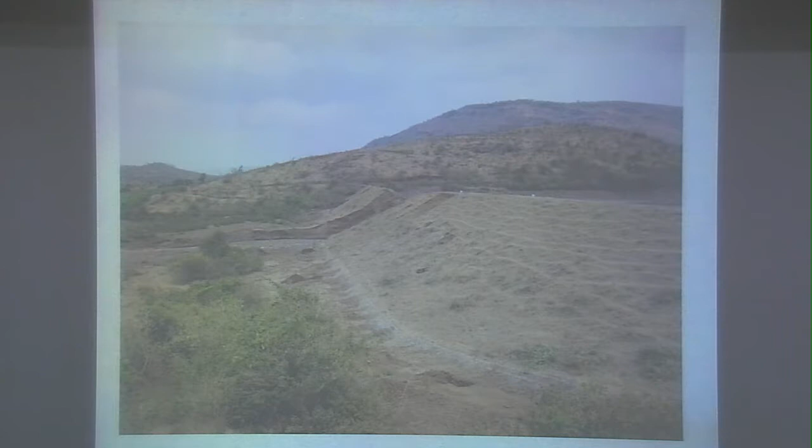Now this was the only slip failure at this point. This is the downstream side. From there we can anticipate that this is a slip failure. This is the downstream side, and we could not anticipate that a wave had crossed it; it probably looks like a slip failure only.

And at the corner, no overtopping was seen at that site, and it was not anticipated that the water had trapped into that corner and overflowed from that place.

When there are so many veterans sitting here, I am a director from Geological Survey of India, Government of India. It is always easy to blame a dam failure on geological conditions, and there are always geological surprises, which clearly show a lineament is different, a shear is different. What has been shown is a covered area.

It is every time a common problem, and geology comes to the rescue of any failure. With so much experience from a Government of India organization, if I don't react to this, I won't find any other time to say this. No, absolutely, it is a covered terrain, a lineament that no geologist can easily go and track.

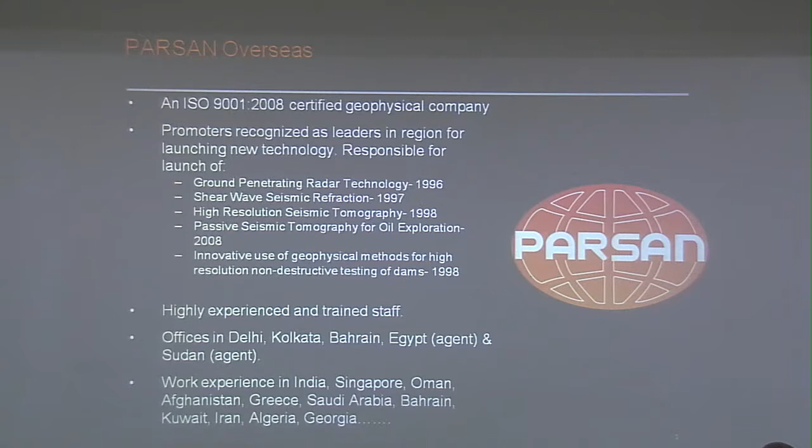Since then, we have been working on various dams on this. Our main strength is our experienced and trained staff. We have offices in Delhi, Kolkata, Bahrain, Egypt, and Sudan, and we have work experience in India, Singapore, Oman, Afghanistan, Greece, Saudi Arabia, Bahrain, Kuwait, Iran, Algeria, and Georgia.

We happen to be the largest engineering geophysics company in India. We have international associations with SkyTEM for airborne geophysics, Seismotech for passive seismic tomography, SolGeo for dam tomography, AmbroGeo for seismographs, and Radar Systems Inc. for GPR technology. We are the only Indian company having complete integrated geophysical capabilities, which includes gravity, magnetic, electromagnetic, electrical imaging, seismic refraction, seismic tomography, GPR, MASW, REMI, crosshole, and tomography.

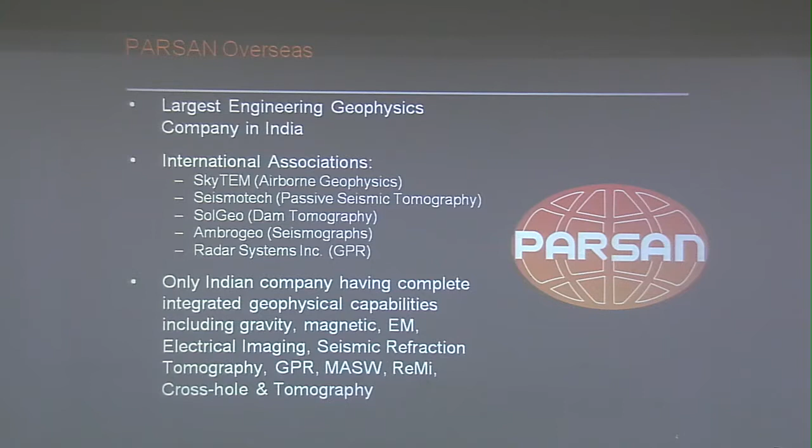Our areas of operation extend from oil and gas to mining geophysics, engineering geophysics, water resource geophysics, environmental geophysics, archaeology geophysics, and geophysics for dam safety. Now for this dam investigation part, yesterday I covered all the methods practically, so I'll just briefly make certain points on why.

This is the most suitable method for regular health checks of dams, because this entire conference was on dam safety. Health checks are a very important part, especially for dams that are getting older. We do not really want to drill into the dams to check their health, so this is totally non-destructive, with early detection of problems.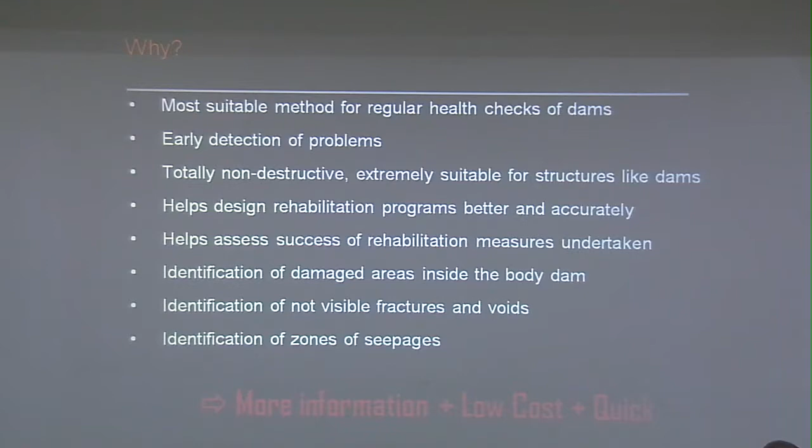When we say inspection of a dam, that means visual inspection of the dam. There are certain problems which exhibit themselves only after some time. So early detection of problems, totally non-destructive, makes it extremely suitable for a structure like dams.

It helps design rehabilitation programs better and more accurately, and helps assess the success of rehabilitation measures undertaken. This was again being discussed in one session today. Once rehabilitation has been done, it is very important to see what the efficacy of the rehabilitation has been, and this can be checked using these methods.

These methods help identify damaged areas inside the body, not visible fractures and voids, zones of seepage, etc. So it gives you more information at low cost and quickly. When I say quick, as we discussed yesterday, a typical dam can be investigated in anything between 3 to 7 days, with a report generated in another 7 days. So we are talking of 15 to 20 days to do a thorough health check of an existing dam.

So that's the strength of this technology we are talking about. Various problems of concrete dams like cracks, degradation, water leaks, landslide in earth embankments, sinkholes, masonry water leaks and strength, and various methods are available for that.

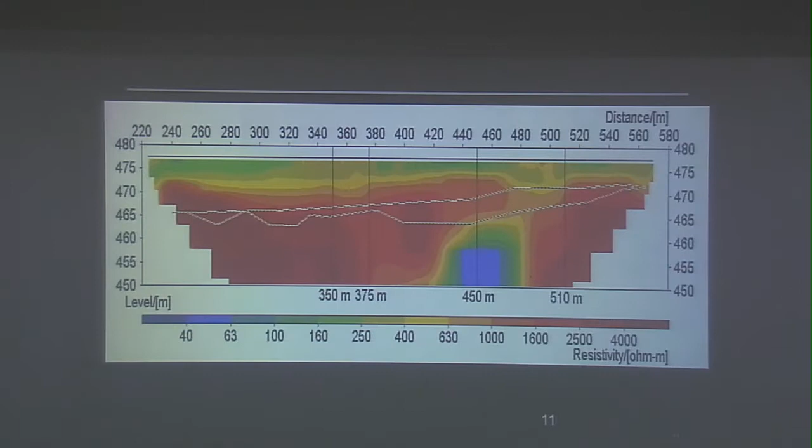Since the chairman has given me 5 minutes, I'll not go through this, we have seen most of these slides anyway. Sorry, all the time I'm taking is in switching the slides, now it's working fine. These are various images you get using these subsurface methods.

This is something new which I wanted to show you. This is seismic tomography, done between the upstream face and downstream face, and it gives very good information of the internal condition of the dam material.

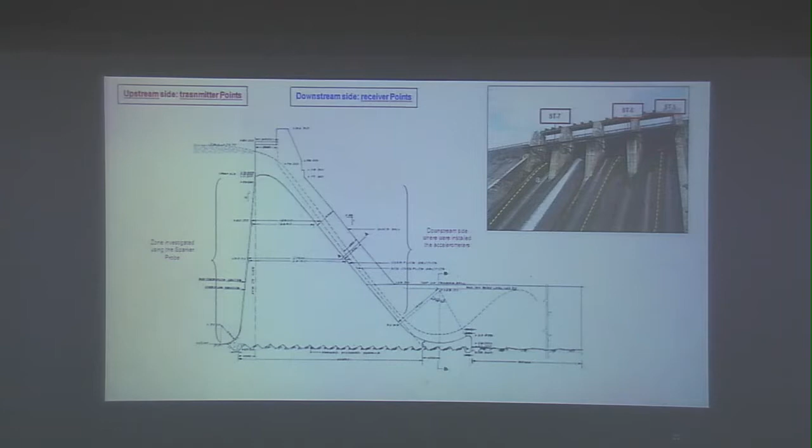This is again an example from India. Two such projects have been done, Tungbhadra and Chimoni in India. This is from one such project where these low velocity areas are basically the areas of concern, which show low seismic velocities.

So you have the P-wave velocities here, which can be converted into density tomography from P-wave velocity tomography, giving very detailed information on the material properties inside the dam. These are the areas of low seismic velocities.

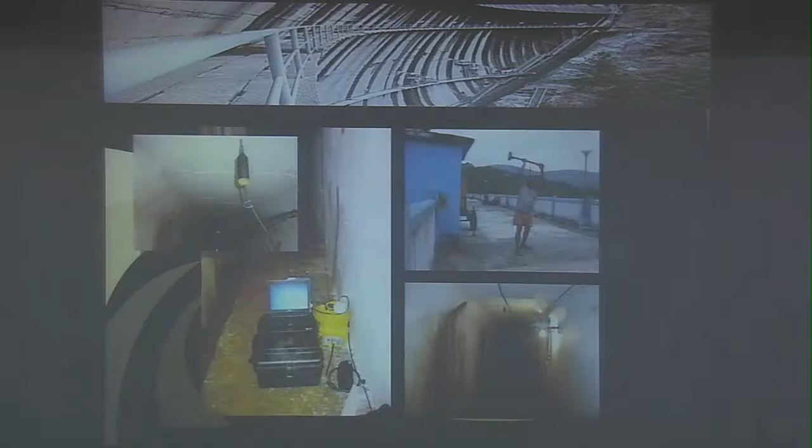These are all the setups for doing these. This same thing can also be done between the gallery and the top of the dam, and the anomalous zones can be very easily detected using this method. So it's a very strong technique to do a complete health check of the dam.

In India, we have already done a number of dams, including Daroli in MP, Tigra Dam in MP, Mullaperiyar in Tamil Nadu, Madikhera in MP, Amrawat, Temghar in Maharashtra, Tungbhadra done by Solgeo, our partner in India, Chimoni also done by Solgeo, and at present we are doing Kanhirpuzha, Kuttayadi, and Malankara in Kerala.

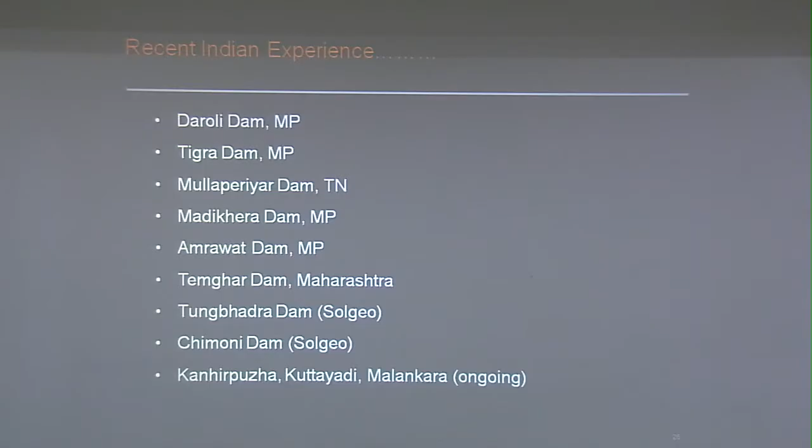So to conclude, geophysical techniques are a very important tool for health checks of dams. Regular monitoring is the key point here. Through this conference, I'd like to make an appeal: if we can make even a duration of 5 or 10 years for important dams where this kind of health check can be conducted, I think we can save a lot of cost, which otherwise comes when we have to do the rehabilitation.

Pre and post rehabilitation inspection is another important point I would like to put across. It should be an indispensable tool made part of the regular inspection process. Whatever inspection process I'm aware of is basically more of physical, visual inspection. If this can be made part of it, I think it would be good for the industry because it saves costs, time, and reduces risk.

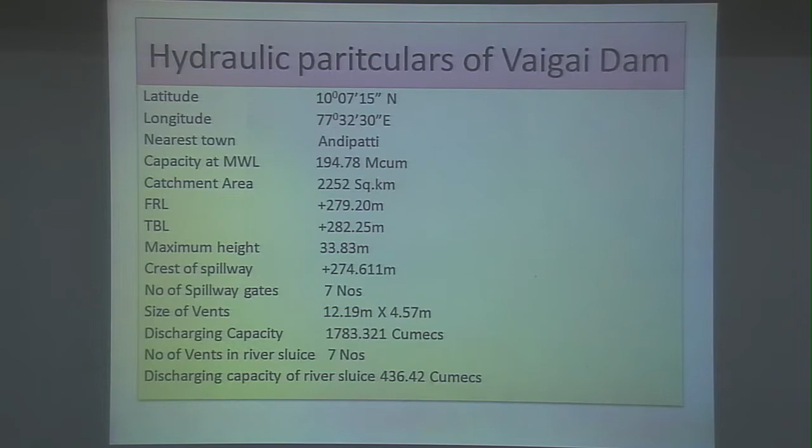So we had gone through the review and made an attempt to re-review the hydrology. We took 2 points for re-review. First, the catchment response function was arrived at by CWC using the flood estimation report of Zone 4C.

In that, we adopted an equivalent slope, which is an average for the catchment.

But seeing the catchment, this is the catchment of Vaigai Dam, and it consists of 3 subcatchments, namely the main Vaigai subcatchment, the Suruliyar subcatchment, and the Teniyar subcatchment.

By working out the actual slope of all 3 streams, we found that the stream is very steep in its initial reaches. Afterwards, from contour 400 onwards, it runs on very flat terrain. So adopting a uniform or average slope may not actually be representing the catchment.

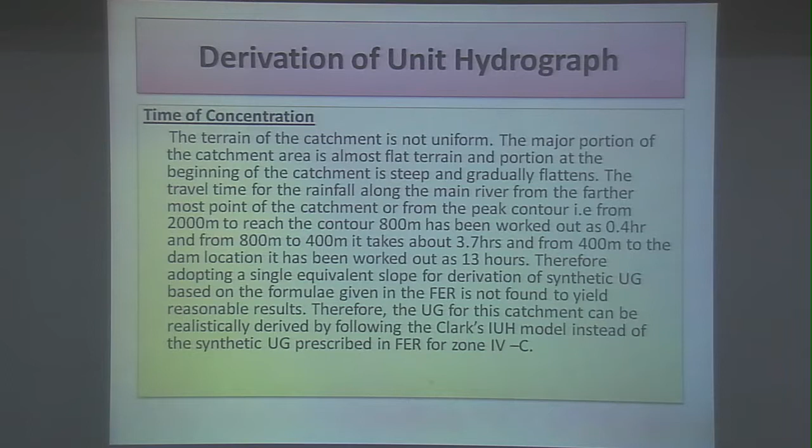So we tried this time area method. In this time area method, isochrones are drawn to find out the area of equal travel time, and we worked out the time of concentration also by subdividing the streams according to the slope, arriving at the time of concentration by segmenting it.

The rainfall data taken for the study was from Devikulam, located in Kerala on the windward side of the Western Ghats. Our catchment is on the leeward side, so that rainfall was found not suitable, and we took the rainfall which was very severe in the same catchment itself.

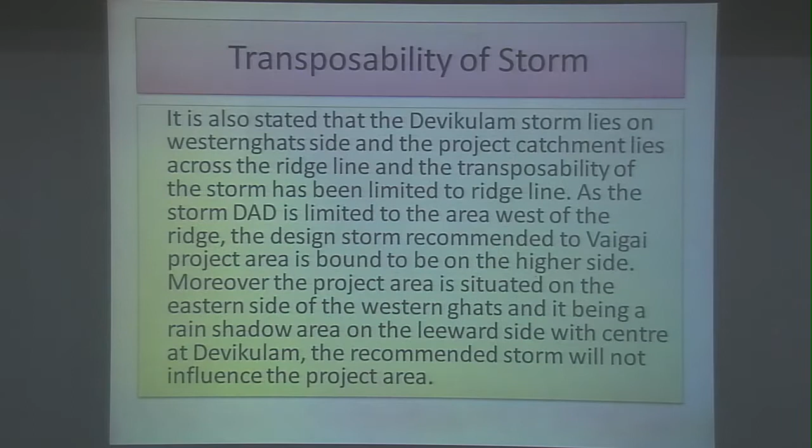By doing all these calculations, we found the PMF to be around 4,500 cumecs as against 9,000 cumecs. We request the Central Water Commission to consider our request for re-review of the Vaigai Dam PMF. Thank you.